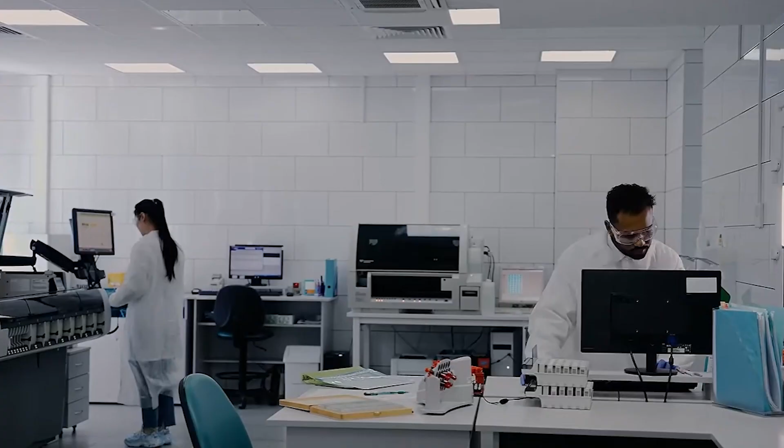A machine in your kitchen right now, humming inside every convenience store and office building across the world, has not fundamentally changed in almost 200 years. An American invented it, but here's what almost nobody knows: Japan is waging its own fierce battle against the exact same machine.

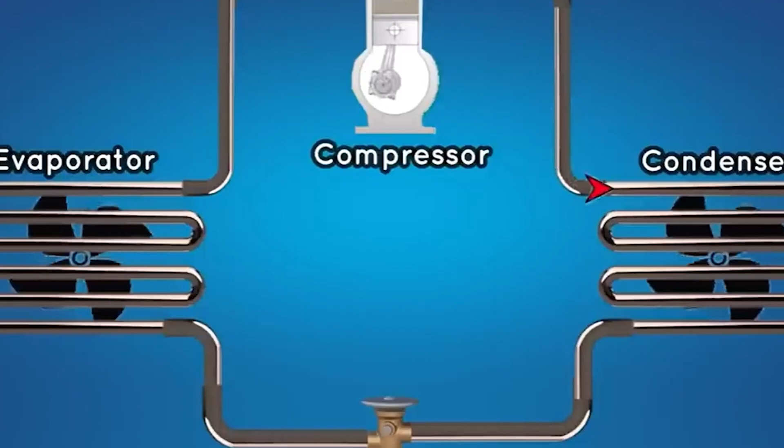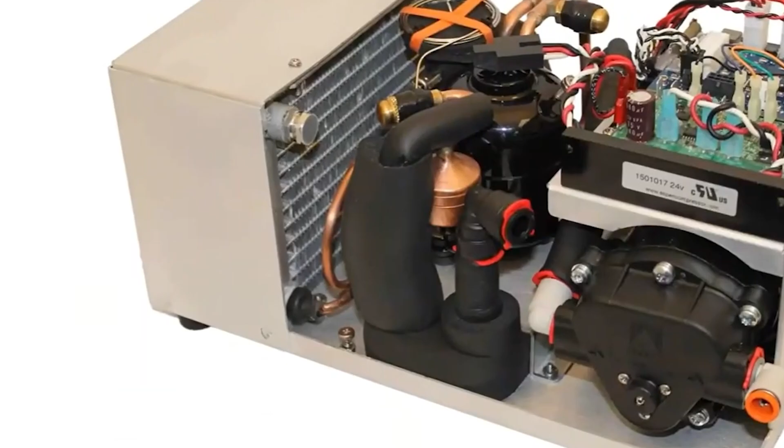Here is what almost nobody thinks about: the refrigerator and the air conditioner were not invented in Japan, nor in Europe, nor in China. The first working vapor compression cooling machine was patented by a man from Newburyport, Massachusetts, named Jacob Perkins, back in 1834. He built a machine that could make ice on demand, and in doing so, he handed the modern world food safety, medicine storage, and livable summers. Nearly two centuries later, the cooling units keeping Tokyo and the world livable still rely entirely on his blueprint.

Now, Japan stands at a critical crossroads, squeezed between brutal summer heat waves, strict environmental laws banning traditional gases, and a strained energy grid. Will the country that mastered the old machine be the one to master its replacement?

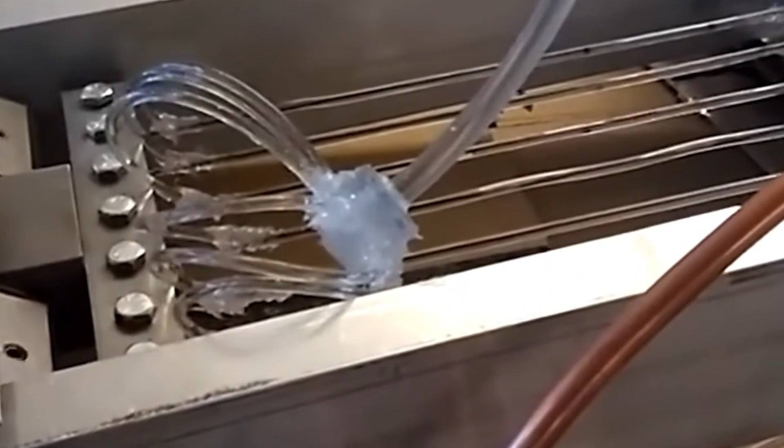While American laboratories in Maryland focus heavily on mechanical hydraulics, rubber-like stretching and squeezing nitinol tubes to escape the 200-year-old vapor compression trap, the intellectual battlegrounds of Japan are approaching the crisis of heat from an entirely different dimension.

In the immaculate, hyper-controlled cleanrooms of the University of Tokyo and the sprawling research complexes of the National Institute of Advanced Industrial Science and Technology, AIST, scientists are looking at the same fundamental problem and arriving at a radically different conclusion. Their answer is not a better machine with fewer moving parts. Their answer is a machine with no moving parts at all.

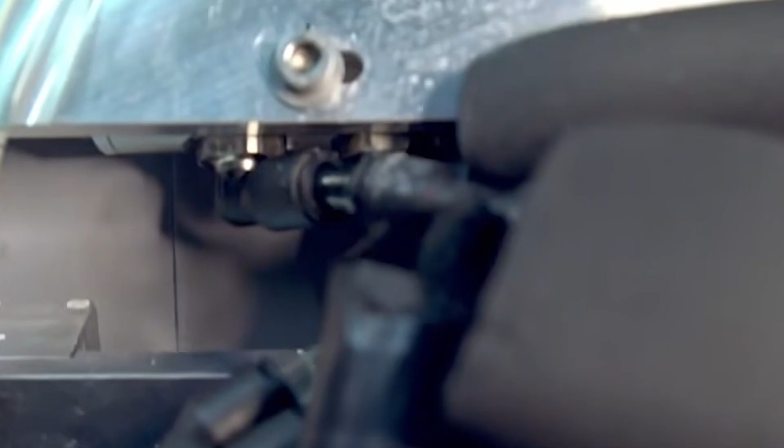This is the frontier of solid-state cooling, and for a nation built on the quiet precision of materials science, it represents a profound national destiny.

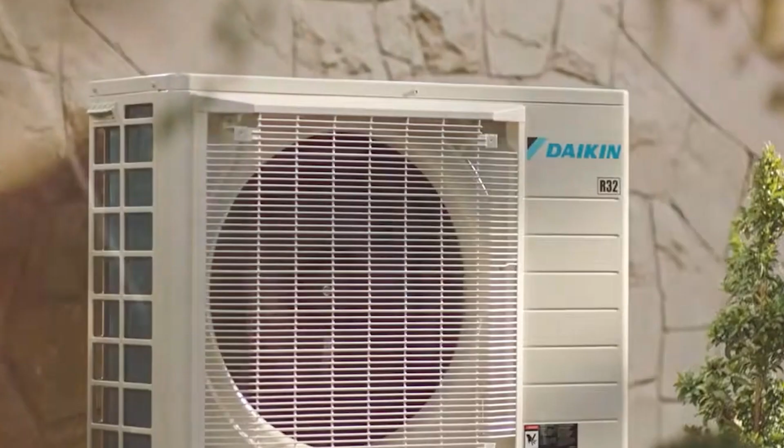To understand why Japanese researchers bypassed the mechanical squeeze, you have to understand the core philosophy of Japanese engineering: efficiency through absolute elegance. A mechanical compressor, no matter how well engineered, relies on friction, pistons, valves, and fluid dynamics. It is a miniature engine living inside your home appliance. But solid-state cooling eliminates the mechanical heartbeat entirely.

Instead of forcing a fluid through pipes or mechanically stressing a metal tube millions of times, solid-state physics manipulates the internal quantum and crystalline structure of matter itself, forcing atoms to release or absorb thermal energy simply by altering their external environment, be it through a magnetic field, an electric charge, or microscopic crystal transformations.

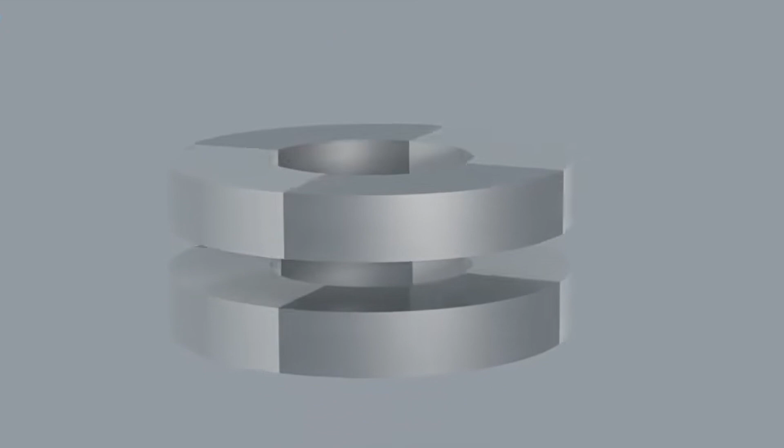At the absolute vanguard of this movement in Japan are two closely related technologies: magnetocaloric and electrocaloric cooling. In a magnetocaloric system, certain specialized rare earth and transition metal alloys possess a fascinating quantum quirk. When you expose them to a magnetic field, their internal magnetic moments abruptly align. This forced orderliness shrinks their magnetic entropy, and as a consequence, the material instantly releases heat. Take the magnetic field away, and the atoms snap back into thermal disorder, greedily drinking in heat from the surrounding air or water.

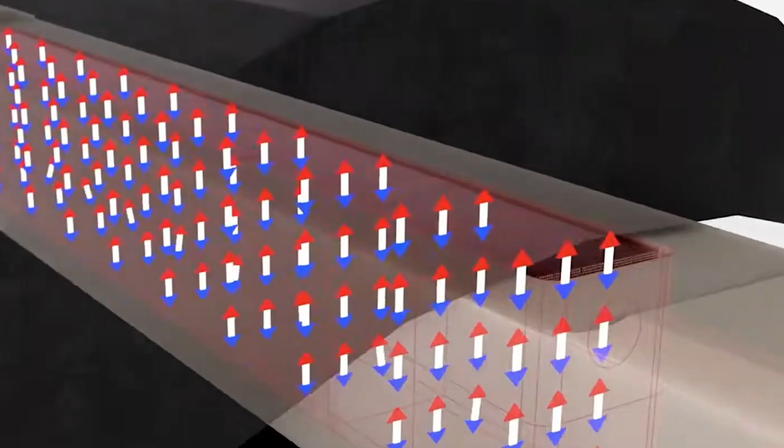There is no gas seeping into the atmosphere. There is no compressor roaring at 2 in the morning. There is only a quiet, oscillating magnetic pulse interacting with a solid metallic matrix.

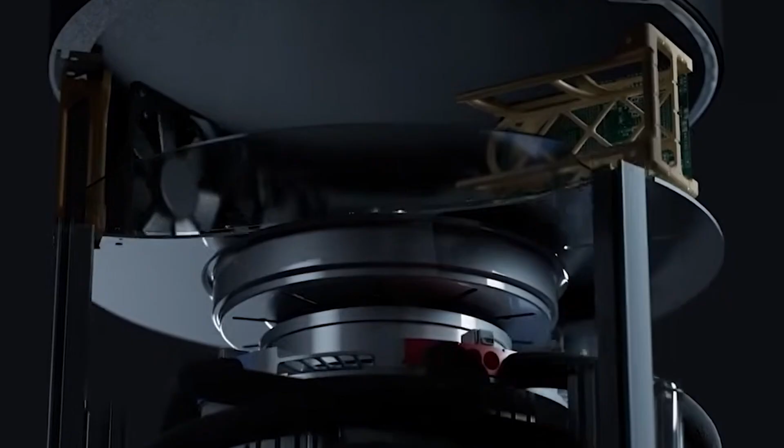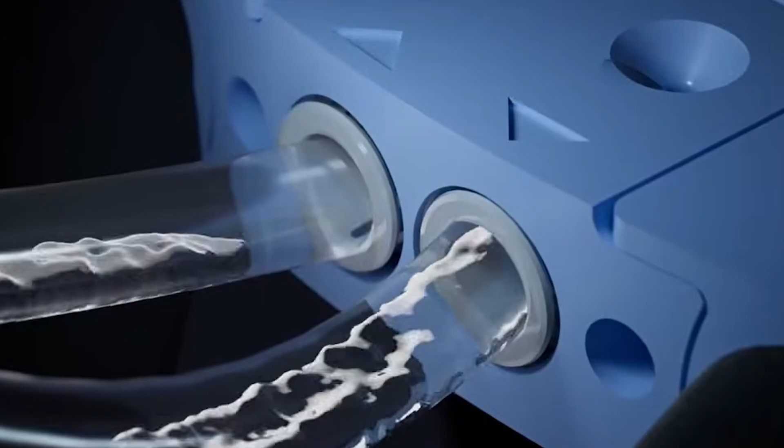Electrocaloric cooling operates on a similar, elegant principle, but uses electricity instead of magnetism. Special ferroelectric ceramics and polymers undergo massive, instantaneous temperature swings when subjected to a fluctuating electrical voltage. Apply a voltage, and the crystal dipoles lock into alignment, dumping heat. Release the voltage, and the structure relaxes into chaotic disorder, plunging in temperature.

For decades, these effects were treated by Western industries as academic curiosities, fascinating physics demonstrations that could chill a microscopic point on a laboratory benchtop by a fraction of a degree, but utterly useless for keeping a Tokyo apartment comfortable during a 40°C August heatwave or chilling bento boxes in a bustling Shibuya convenience store.

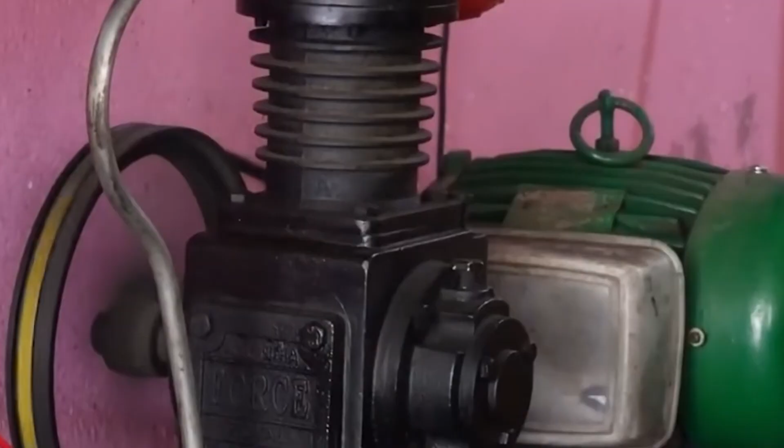The temperature spans were too narrow, the materials too brittle, and the required magnetic or electrical fields too impossibly large for practical engineering. This is where Japan changed the equation, because the country is a global superpower in materials science, honing its expertise through decades of ceramic engineering for bullet trains, advanced semiconductor substrates, and high-frequency electronics. Japanese laboratories began to look at these caloric materials not as fragile lab samples, but as customizable molecular architectures.

Instead of copying foreign designs, research teams across Tsukuba and Kyoto began engineering entirely new chemical compositions.

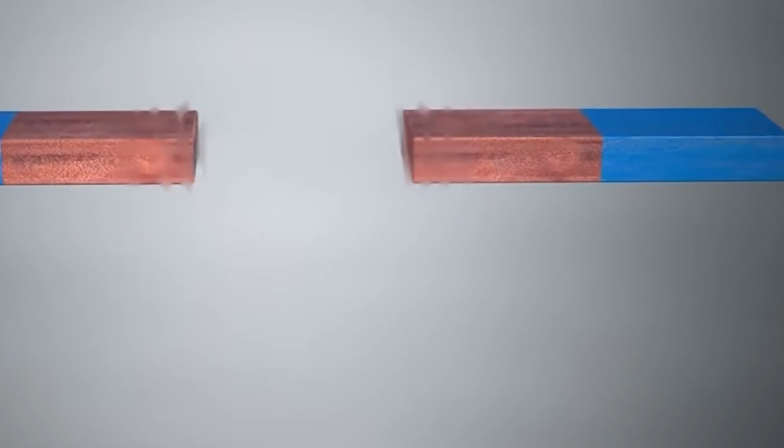They doped lanthanum iron silicon alloys and advanced lead-free ferroelectric ceramics at the atomic level, optimizing crystal grain boundaries to maximize thermal output. They discovered that by tuning the microscopic lattice structures of these materials, they could achieve temperature spikes and drops of tens of degrees, rivaling and eventually surpassing the cooling capacity of traditional chemical refrigerants.

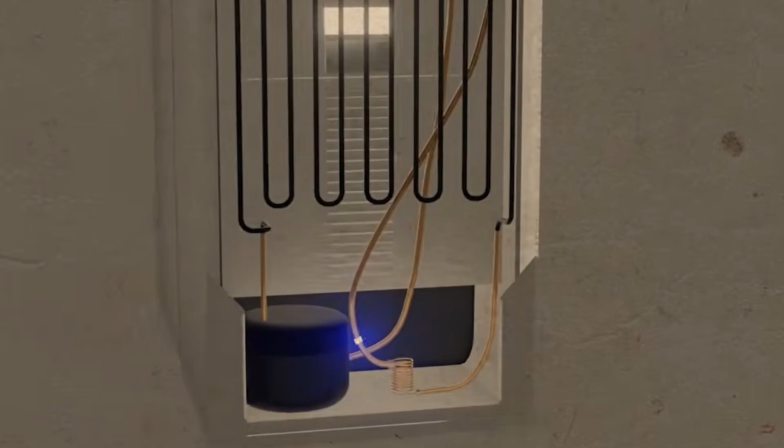Japan's scientific strategy recognized a fundamental truth that the rest of the world was slow to grasp: when you are trying to replace a 200-year-old global technology, you cannot simply build a cleaner version of the old machine. You have to change the medium of reality itself by shifting the entire paradigm from chemistry, trapped gases and synthetic fluids, to physics, solid-state atomic alignment. Japan positioned itself to leapfrog the regulatory traps of global environmental treaties.

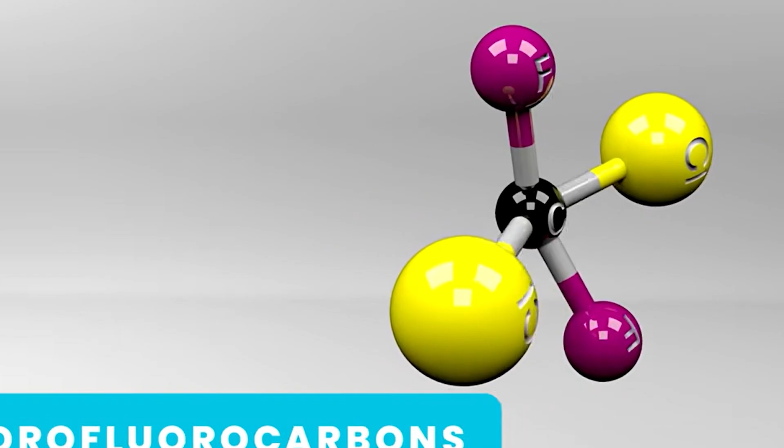Yet translating a brilliant molecular trick from a university spectrometer into a viable commercial product in a resource-constrained island nation is a brutal gauntlet. The moment you take a breakthrough out of the clean room and demand it survive the relentless reality of daily consumer use, you run straight into a microscopic wall of physics that has humbled generations of engineers. Moving a revolutionary cooling technology from a university spectrometer to a commercial appliance factory is a brutal engineering gauntlet - it is the graveyard of thousands of brilliant physics concepts.

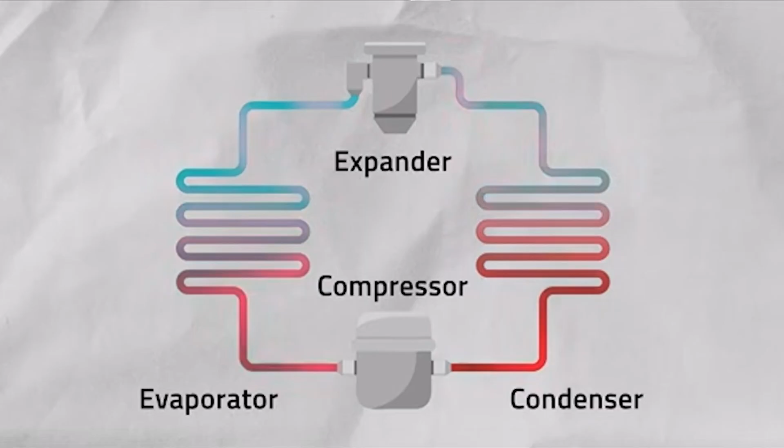For decades, researchers across the globe discovered fascinating caloric materials that could spike or drop in temperature under magnetic fields, electric voltages, or mechanical stress. Yet nearly every single early prototype shared a fatal flaw: it possessed a heartbreakingly short lifespan.

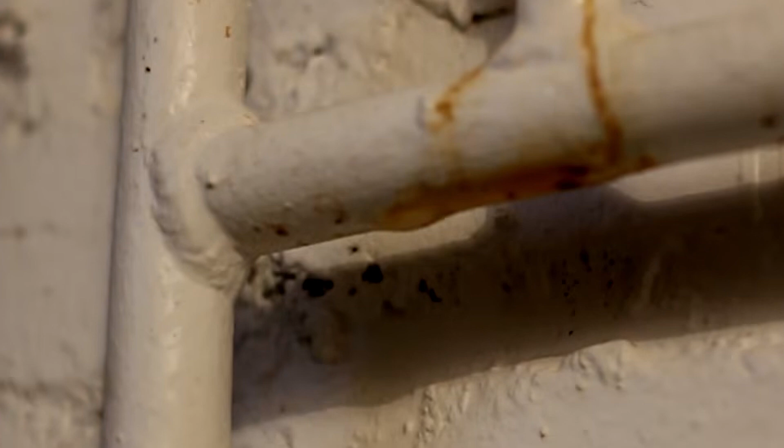To understand why building a solid-state cooling device is an exercise in extreme frustration, you have to look at what an appliance demands of its core mechanism. A household refrigerator or a commercial air conditioning unit in a Tokyo office building does not cycle a few hundred times. It operates continuously, switching on and off thousands of times a year, enduring tens of millions of distinct thermodynamic cycles over a decade or more of service.

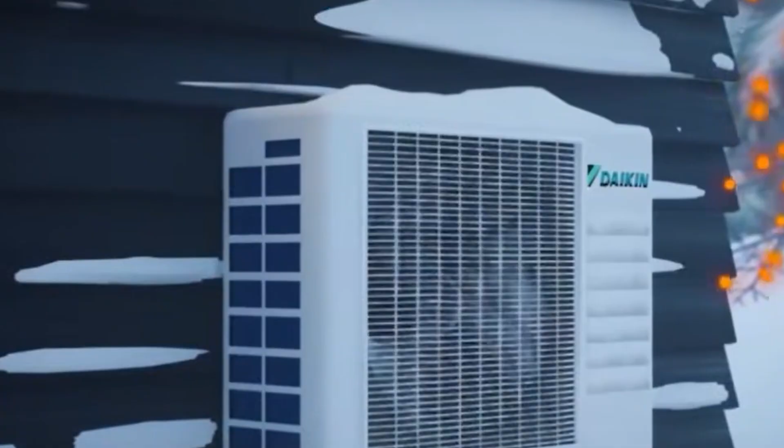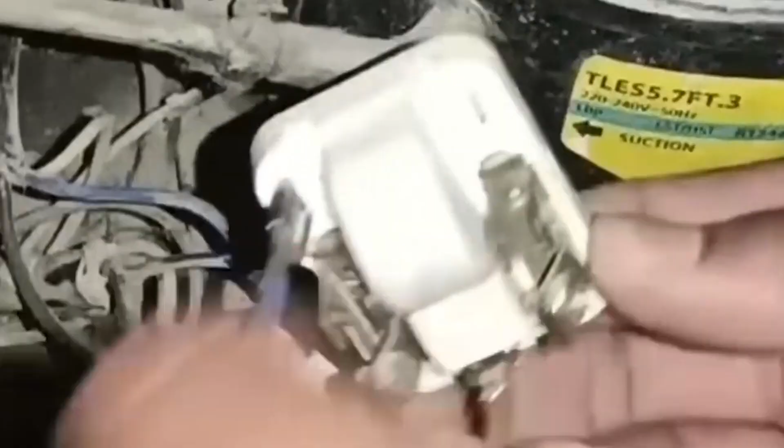Traditional vapor compression systems handle this through brute force. A mechanical compressor is built from heavy steel pistons, thick bearings, and durable motor windings designed to withstand continuous vibration. When a compressor finally dies after 15 years, it usually fails because a seal degraded or a bearing wore down from sheer friction. Solid-state cooling systems do not have friction in the traditional sense, but they face an even more insidious enemy: microscopic fatigue.

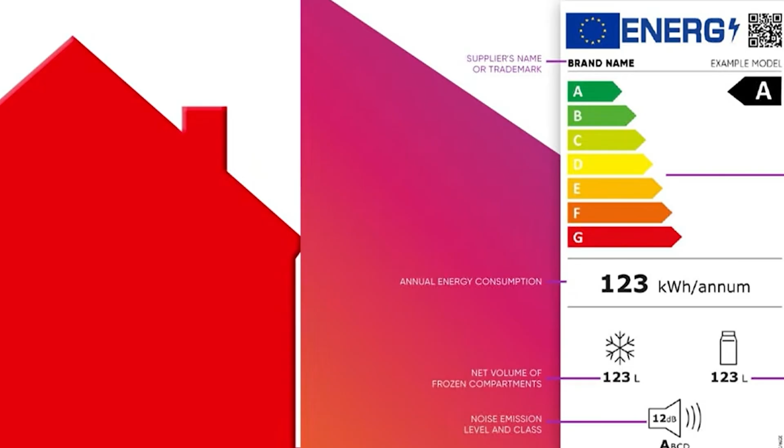When advanced alloys, shape memory metals, or ferroelectric ceramics undergo continuous phase transitions, rapidly snapping their internal crystal structures between ordered and disordered states millions of times, the material itself experiences internal trauma. At the atomic scale, no metal or ceramic is entirely uniform. Every sample contains microscopic voids, tiny boundary shifts, or slight imperfections born during the manufacturing process. Every single time the material triggers its cooling or heating cycle, those microscopic flaws experience localized stress.

In early solid-state prototypes, researchers watched in dismay as beautiful, high-performing cooling cores developed microscopic hairline fractures after just a few thousand cycles. Within weeks of continuous operation, the stress concentration widened those cracks, and the expensive alloy or ceramic sheared entirely in half, rendering the machine useless. The physics worked brilliantly, but the materials literally tore themselves apart from repetition.

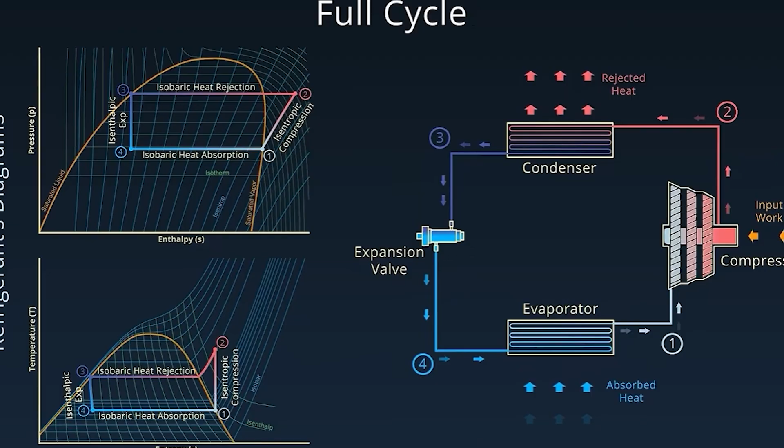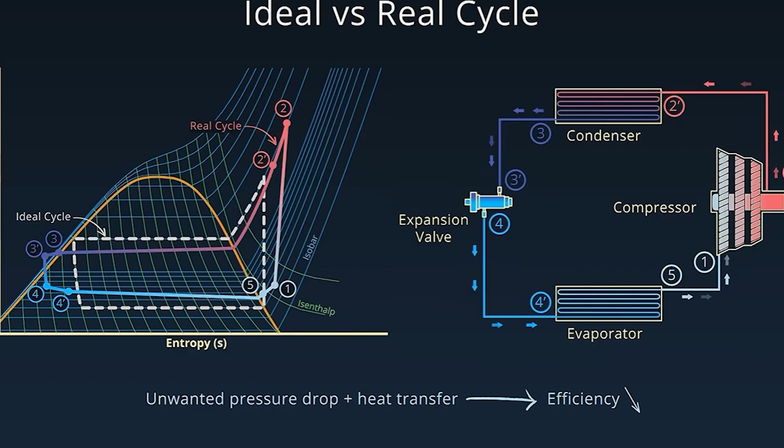For Japanese research institutions and advanced materials labs, solving this fatigue wall became the ultimate obsession. Japanese engineering thrives on longevity - the culture that created machinery designed to run seamlessly for decades without maintenance could not accept a cooling core that self-destructed in a month.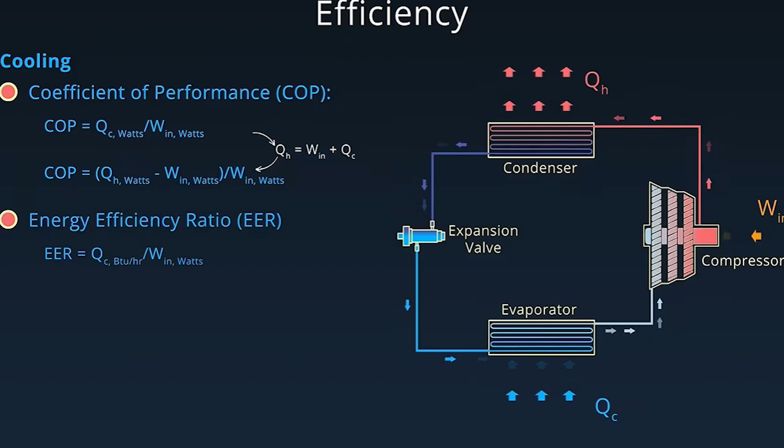To conquer this wall, material scientists began manipulating the microstructure of the cooling elements at a quantum level. Instead of relying on bulk metals that cracked under uniform stress, teams at industrial R&D hubs began developing composite matrices. They embedded active caloric particles inside flexible, high-durability polymer binders, or engineered advanced single-crystal structures where the atomic lattice could shift gracefully without creating stress focal points. By controlling grain growth with extreme precision during the casting and sintering processes, they forced the materials to absorb millions of structural transitions without propagating cracks.

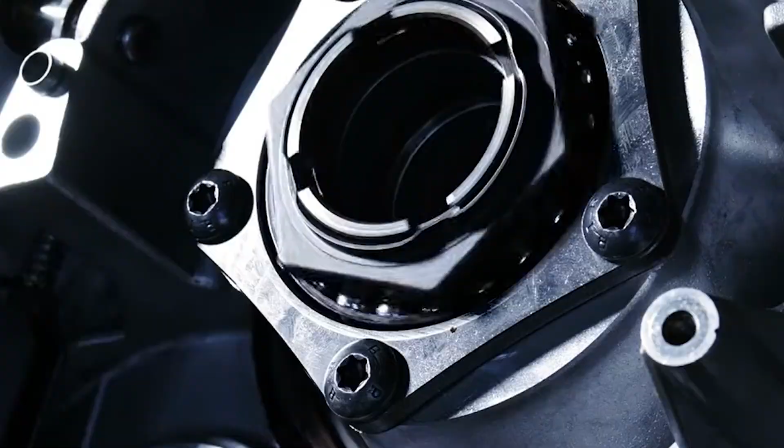Furthermore, engineers had to rethink how thermal energy was transferred away from these solid cores. Because there is no rushing river of chemical gas to carry heat to the back coils, solid-state systems rely on secondary heat transfer loops, often using plain, safe water or specialized microchannels that snake directly through the solid matrix. Designing these fluid pathways to handle millions of rapid thermal expansion and contraction cycles without leaking added an entirely separate layer of mechanical complexity.

The challenge of durability proved that inventing a revolutionary cooling effect is only the first step.

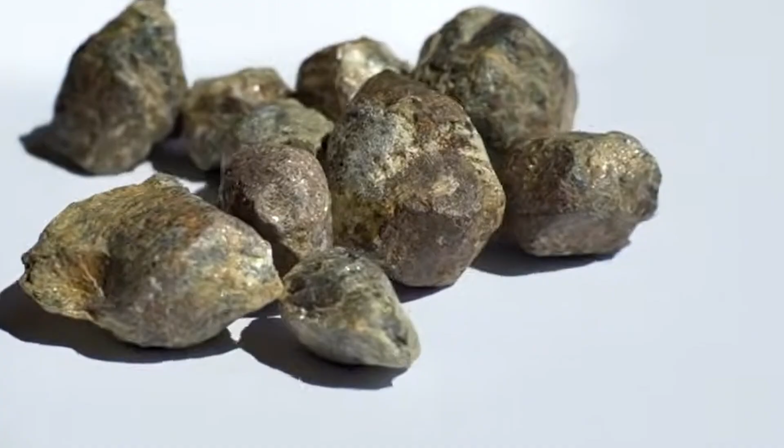The true test of an industrial civilization is whether it can force exotic physics to behave with the mundane, unbreakable reliability of a kitchen appliance. As Japanese labs in Tsukuba and Kyoto began pushing past the fatigue wall, they realized that solving the material's lifespan was only opening the door to an even greater national imperative: making the technology small enough, quiet enough, and precise enough to fit into a changing society.

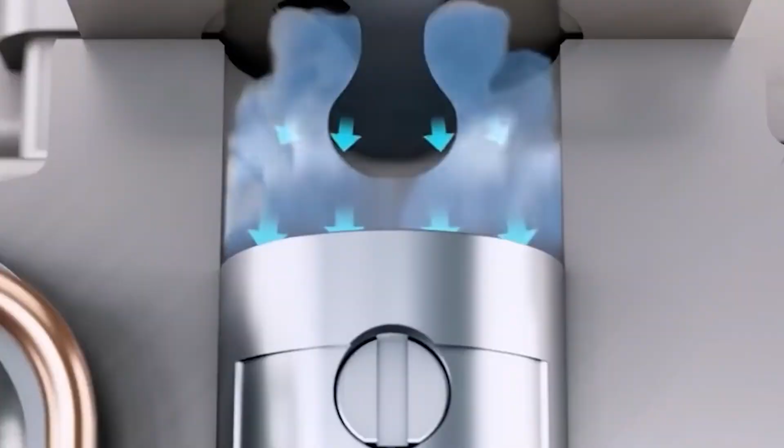When you strip away the heavy compressors, the roaring fans, and the miles of copper tubing filled with pressurized chemical gas, you are left with something radical: a cooling system that takes up almost no space and makes virtually no sound. For a nation like Japan, where space is intensely curated and the cultural appreciation for tranquility is deeply rooted, this is not merely an engineering upgrade. It is an invitation to rethink how machinery coexists with human life.

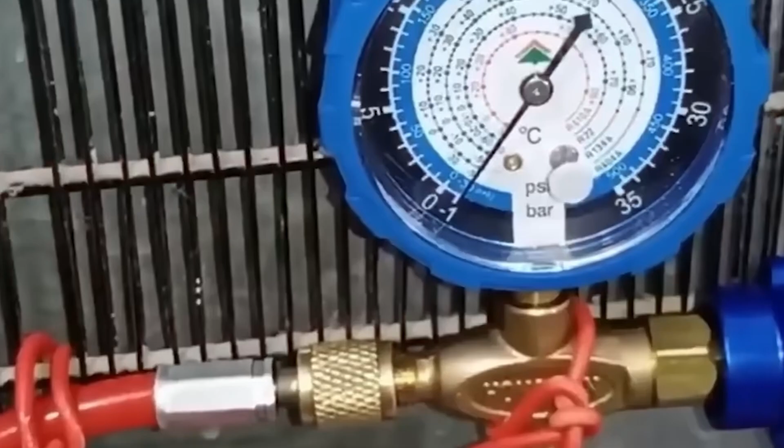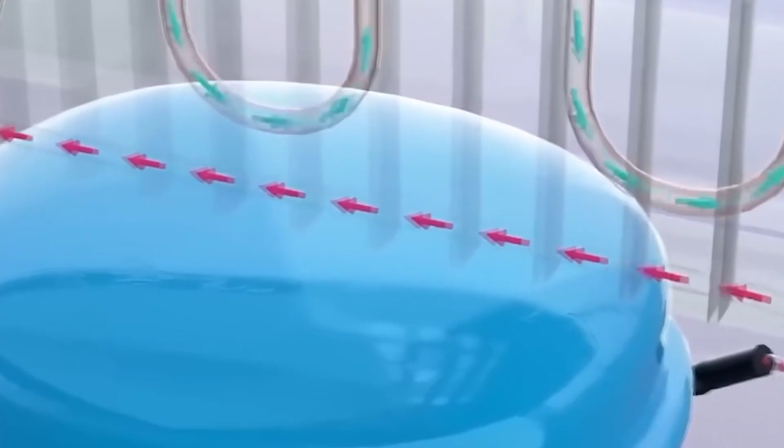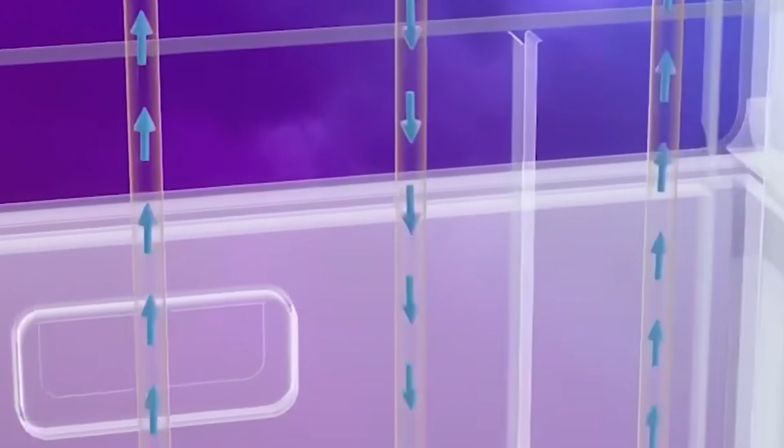In Japanese manufacturing, there is a guiding philosophy known as Monozukuri, the art, science, and spirit of making things. It emphasizes craftsmanship, continuous improvement, and an obsessive pursuit of perfection, particularly when it comes to shrinking technology without sacrificing power. For decades, Japanese consumer electronics companies mastered the art of miniaturization, packing unimaginable computing power into slim smartphones, whisper-quiet laptops, and pocket-sized devices. Yet, while electronics grew smaller and quieter, the thermal management systems required to keep them from melting remained trapped in the 19th century.

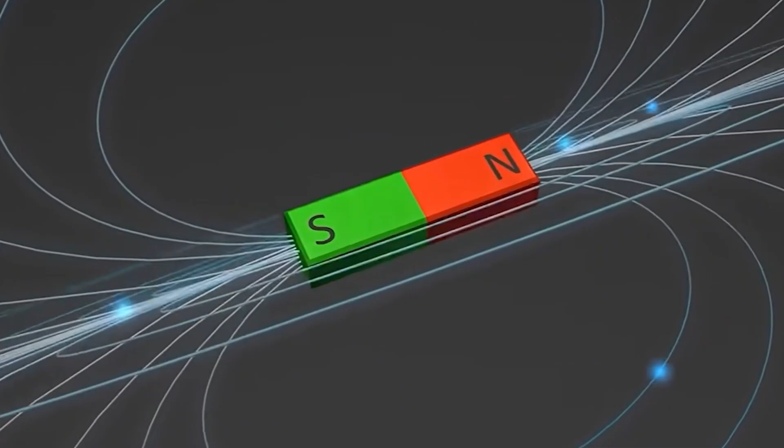A traditional vapor compression refrigerator or air conditioner cannot be shrunk beyond a certain physical limit. You need a motor, a compressor pump, expansion valves, and a specific volume of gas to manage thermodynamic cycles effectively. This physical constraint has long dictated the architecture of our homes, vehicles, and appliances. Fridges must be bulky metal boxes. Air conditioners require massive outdoor condenser units bolted to building exteriors.

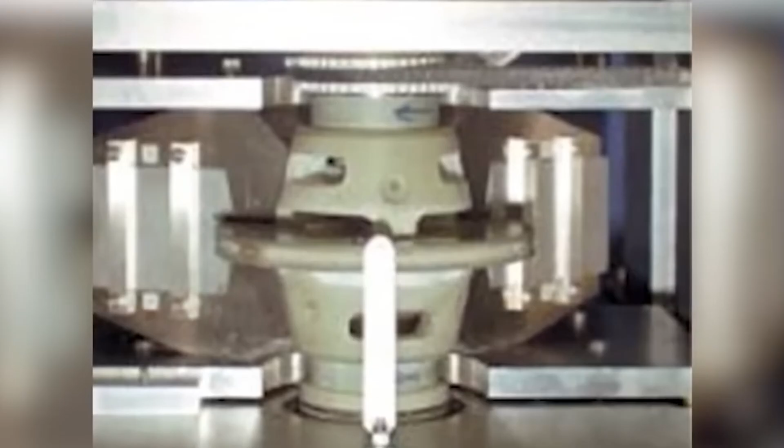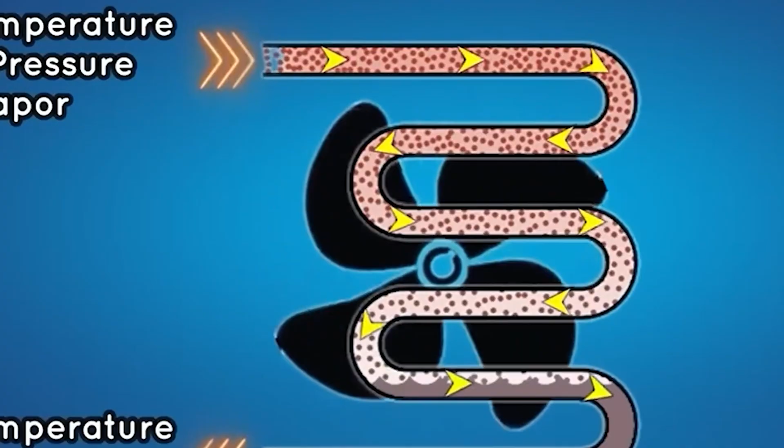Solid-state caloric cooling shatters these architectural boundaries entirely, because the cooling effect is generated directly within the atomic matrix of a solid material. Whether through magnetocaloric, electrocaloric, or elastocaloric phase changes, the cooling engine no longer needs to look like an engine. It can take any shape. It can be formed into a flat sheet, sculpted into a honeycomb cylinder, or miniaturized into a tiny module no larger than a deck of cards or a postage stamp.

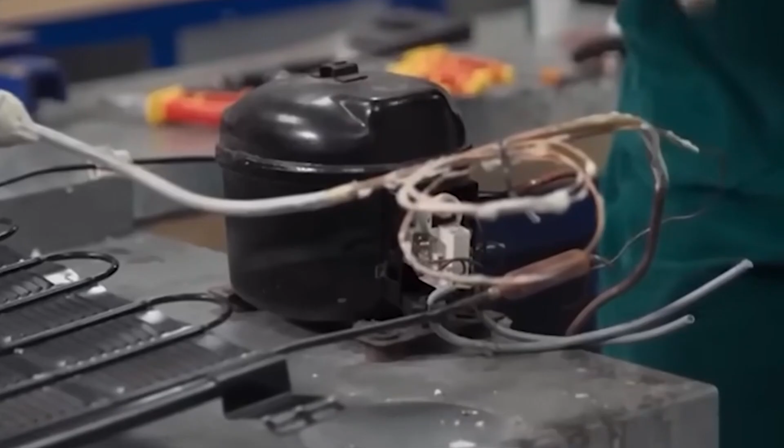This scalability unlocks entirely new frontiers where traditional vapor compression is utterly useless. Take, for instance, the modern data center. As advanced artificial intelligence clusters and massive server farms process billions of parameters daily in cities across the globe, they generate concentrated, ferocious heat in hyperdense spaces. Traditional liquid chilling loops and massive rooftop air handlers consume staggering amounts of electricity, sometimes requiring millions of gallons of water just to keep server racks from overheating.

A solid-state cooling core changes the geometry of thermal management. Instead of pumping chilled air across an entire room or forcing liquid through complex external plumbing, a flat, solid-state caloric module can be embedded directly against the microprocessors themselves. It can pump heat away at the exact point of generation, with zero noise, zero vibration, and a fraction of the energy footprint. Consider the electric vehicle.

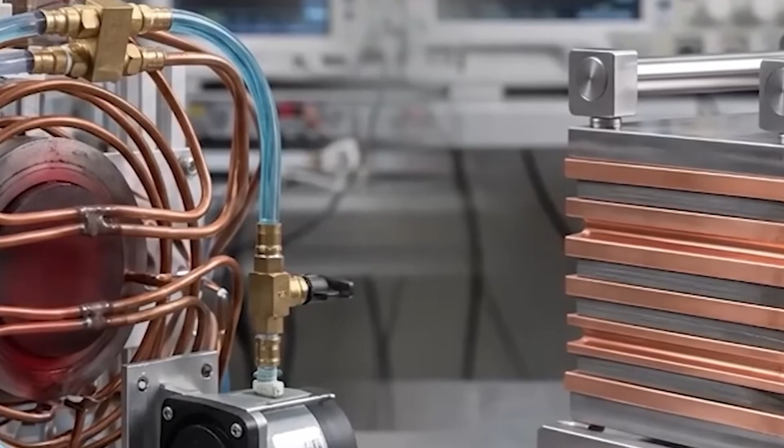In modern EVs, fast charging sessions generate intense thermal stress inside the battery pack. Managing that heat effectively dictates how long the battery survives and whether it operates safely. Current thermal management systems add significant weight, complex plumbing, and numerous potential failure points to the vehicle. A compact, solid-state cooling element can be integrated seamlessly into the battery modules, conforming to the contours of the pack itself, providing targeted, instant temperature control without heavy compressors or vulnerable refrigerant lines.

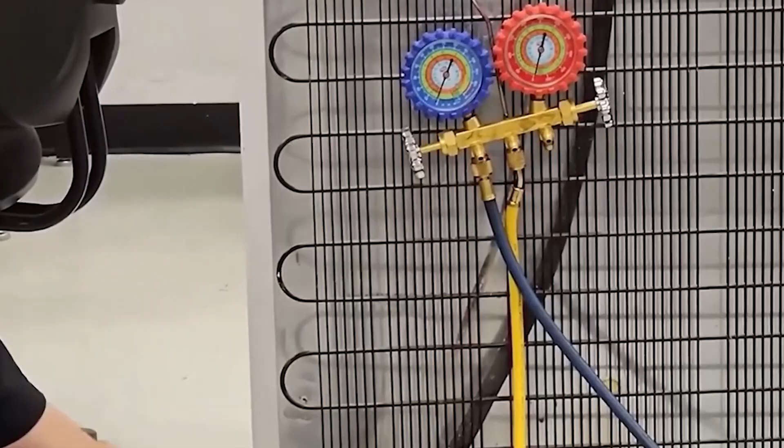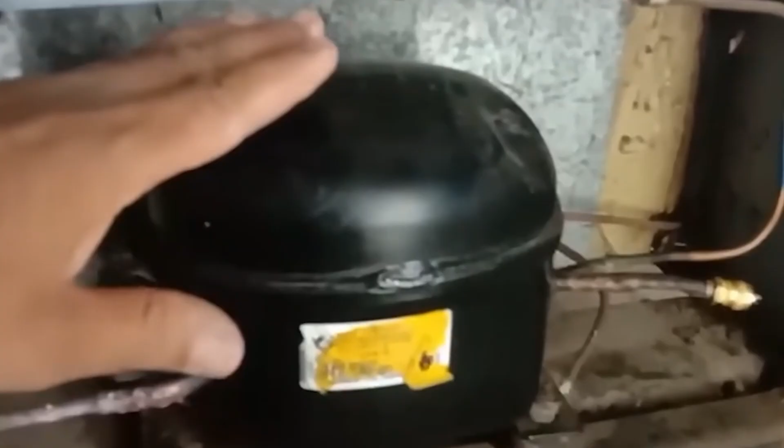Even in high-precision robotics, a sector where Japan is a global pioneer, the implications are profound. Humanoid robots and advanced automation systems require tight thermal control for their internal actuators and computing units. Traditional cooling systems are heavy, awkward, and introduce mechanical vibrations that interfere with delicate sensors. Solid-state modules offer silent, vibration-free temperature regulation that can fit into the tightest limbs and joints of a robot without adding dead weight.

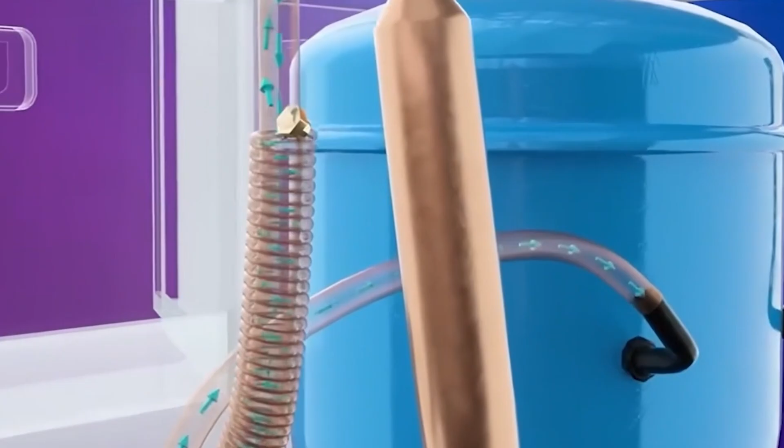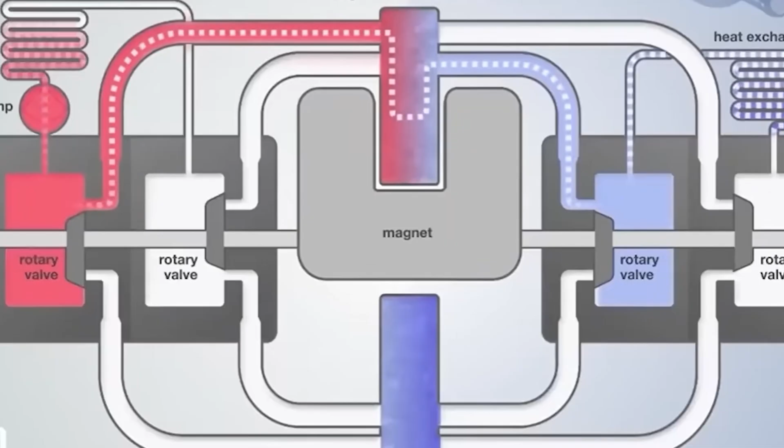Furthermore, this extreme miniaturization aligns perfectly with Japan's broader ecological goals. In a society facing a shrinking workforce and a critical need to optimize energy consumption across every sector, appliances that use less power, occupy minimal space, and operate in total silence represent the ultimate evolution of design. Yet, as laboratories in Tokyo and Kyoto successfully demonstrate these postage stamp-sized cooling cores, working with astonishing efficiency on test benches, they face a daunting final hurdle. Moving from a brilliant conceptual breakthrough that fits in the palm of a hand to a mass-produced commercial reality means confronting the giants of global manufacturing and the entrenched supremacy of the 150-year-old compressor.

The distance between a triumphant laboratory demonstration and a product sitting on a warehouse shelf is measured in billions of dollars, decades of industrial muscle, and the fierce resistance of entrenched incumbents. For all the elegant physics of solid-state cooling, its material science breakthroughs, and its silent, miniaturized potential, it faces a monumental adversary: the modern vapor compression machine, optimized by global industry for a century and a half.

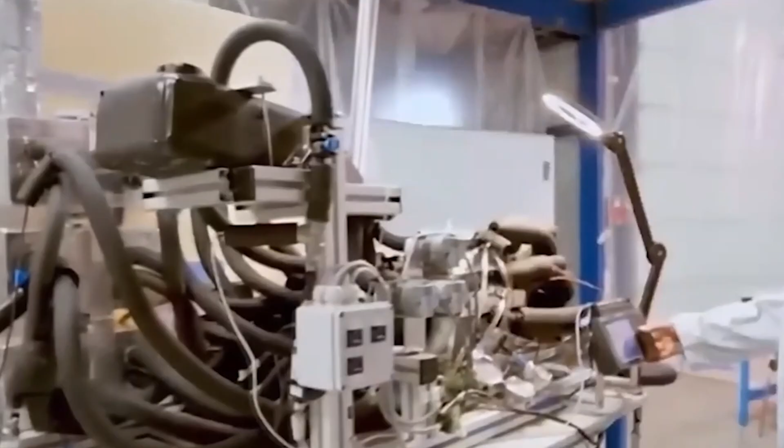In boardrooms across Tokyo, Osaka, and Nagoya, legacy manufacturing giants, household names like Daikin, Panasonic, Mitsubishi Electric, and Toshiba find themselves standing at a historic crossroads. These companies built their global empires on the back of traditional cooling. They operate massive factories, stamping out millions of highly efficient, reliable, and dirt-cheap compressors every single year. Their supply chains are deeply entrenched, their manufacturing tolerances are calibrated to micrometer precision for copper and steel.

Their engineering teams have wrung every possible fraction of efficiency out of the vapor compression cycle. To a traditional corporate strategist, pivoting away from this proven architecture looks like an economic gamble of terrifying proportions. Why abandon a multi-billion-dollar cash cow that runs like clockwork?

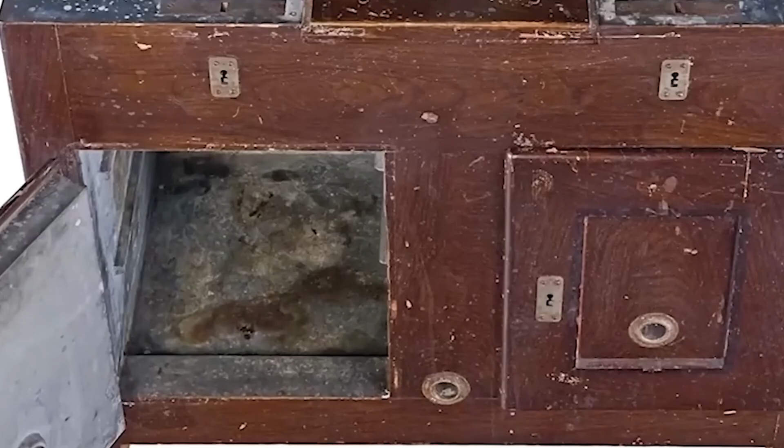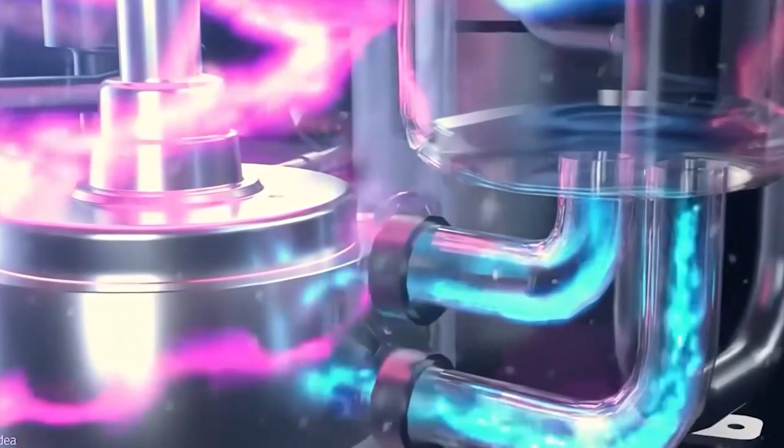The answer is that the ground beneath their feet is shifting irrevocably. Regulatory pressure has turned the traditional chemical refrigerant market into a ticking clock. Under international environmental agreements and strict domestic legislation mirroring global phase-downs of high GWP gases, traditional chemical refrigerants are being systematically outlawed. Japan's industrial sector has already invested heavily in transitional chemical alternatives, such as the R32 refrigerant, pioneered widely by Daikin. R32 lowered the environmental impact compared to older legacy gases, but it is still a chemical fluid under pressure, carrying long-term regulatory vulnerability and safety considerations like mild flammability.

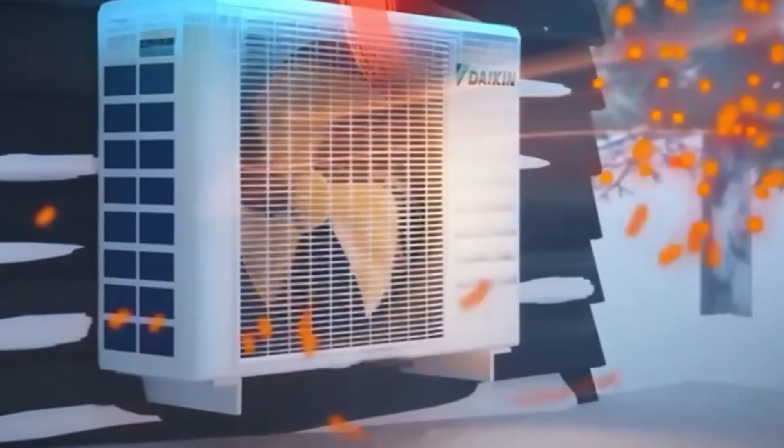The writing on the wall is clear to forward-thinking executives. Transitional gases are merely a temporary stay of execution. Eventually, environmental regulations will tighten further, or the economic cost of managing synthetic fluids will outweigh the benefits. When that day arrives, companies that rely entirely on vapor compression will face a sudden, catastrophic obsolescence.

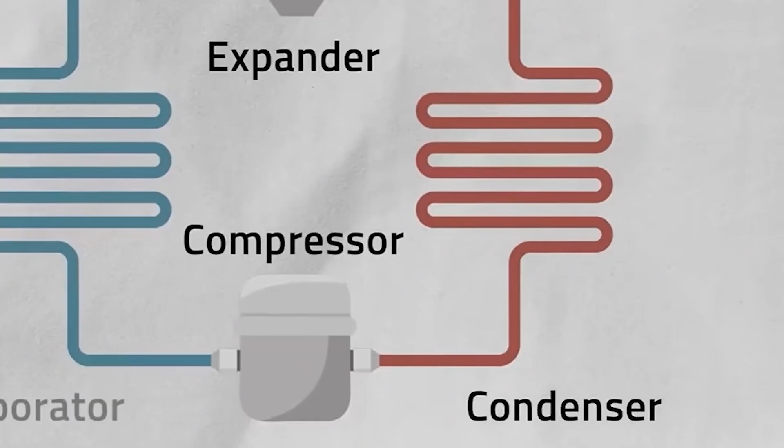This reality has forced a dual strategy inside Japan's industrial research complexes. On one hand, legacy giants continue to refine traditional systems, driving inverter efficiency to astonishing heights and building smart, AI-optimized climate controls for modern homes. On the other hand, they are quietly, intensely funding and co-developing next-generation solid-state and caloric cooling research alongside national institutes like AIST. However, transitioning from research to mass production exposes brutal economic realities.

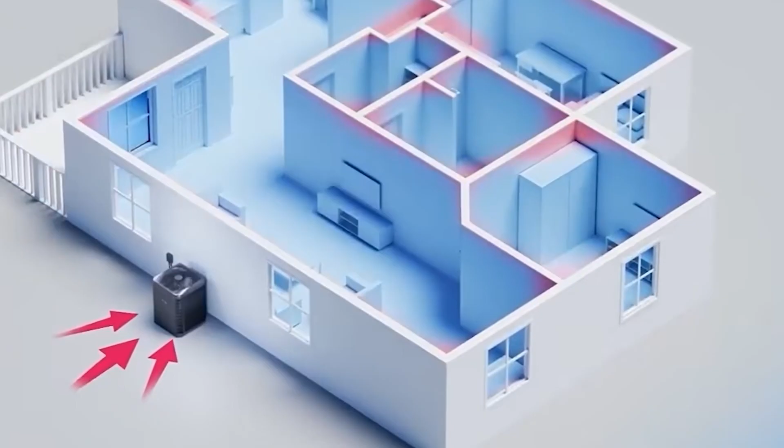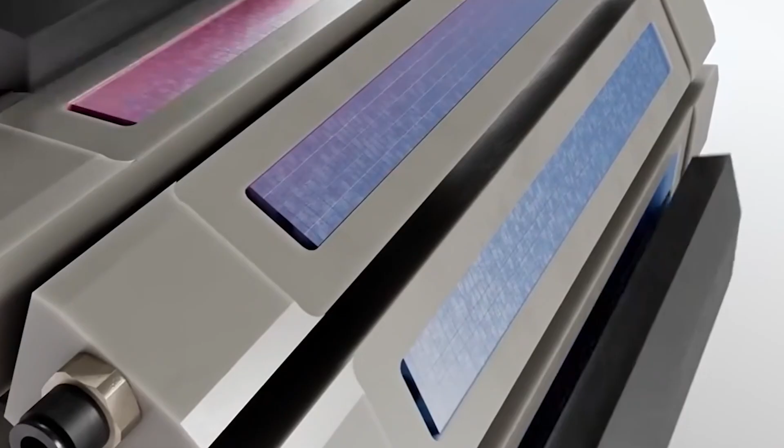Solid-state cooling relies on exotic materials, specialized rare earth alloys, complex ferroelectric ceramics, or precise shape memory lattices that require hyper-controlled manufacturing environments. Melting and sintering these materials without introducing microscopic structural defects demands specialty furnaces, extreme vacuum conditions, and raw material purity that borders on the absurd.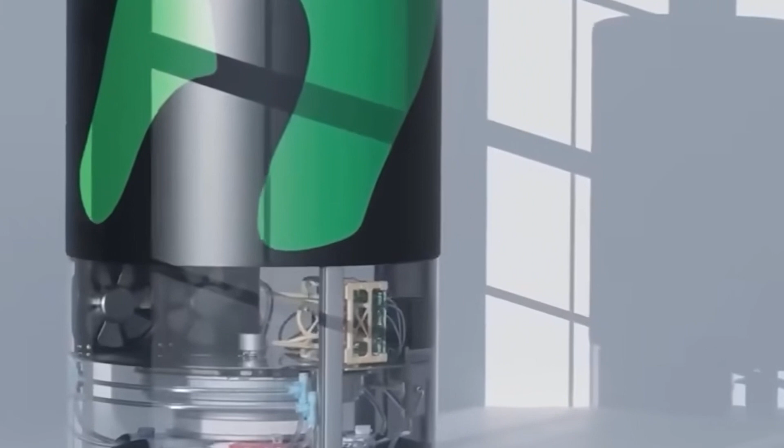While a traditional compressor is stamped out of cheap, abundant steel by automated assembly lines in a matter of minutes, a high-performance solid-state cooling core is currently closer in complexity to a high-end semiconductor chip. The upfront capital cost of retooling a factory floor to produce solid-state cores at scale is staggering.

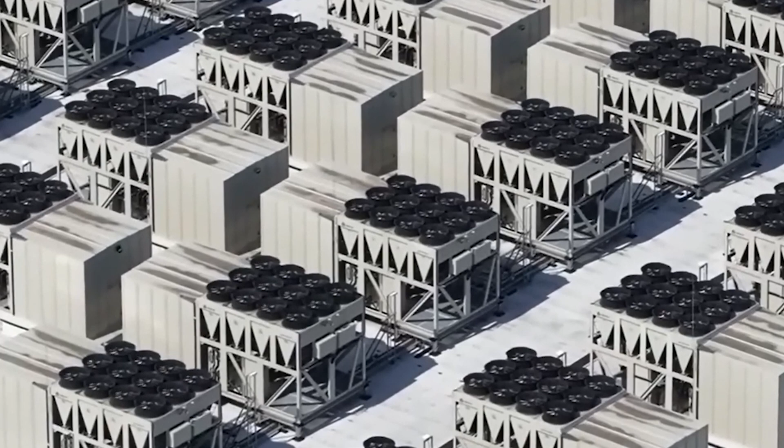Furthermore, the incumbent machine is not sitting still. A vapor compression system is cheap, incredibly powerful per unit of volume, and backed by a global network of repair technicians who know how to fix a leaking pipe or replace a worn-out fan motor. A solid-state cooling device must not only match that cooling output, it must do so at a price point that makes economic sense for a consumer buying a household refrigerator or a small office air conditioner.

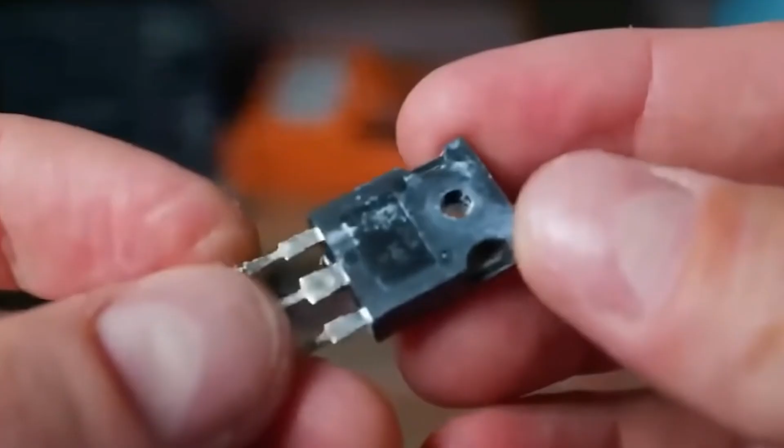Yet, history shows that this is precisely the friction point where paradigm shifts occur. Every transformative technology, from the early mainframe computers that filled entire rooms to the initial solar cells that were once priced exclusively for satellite programs, began as an impossibly expensive laboratory novelty. They crossed the chasm, not because they were marginally better at the old game, but because they changed the rules of the game entirely.

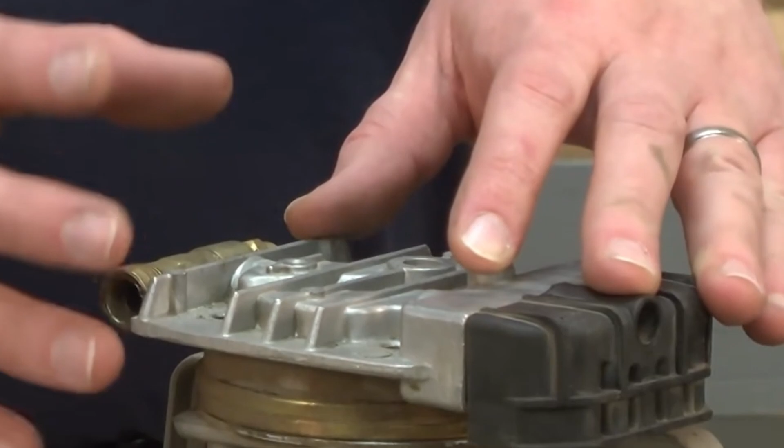As Japanese industrial leaders weigh the immense costs of retooling against the inevitable arrival of a gas-free future, a quiet realization is taking hold. The race to commercialize solid-state cooling is no longer just a technical exercise, it is a race for industrial sovereignty. The company and the country that successfully scales the solid-state core from a fragile lab bench into an unshakable, mass-produced commercial reality will dictate the thermal architecture of the 21st century.

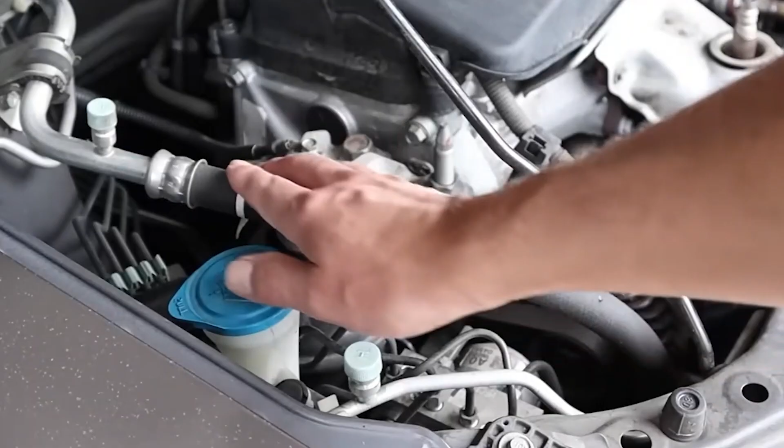And that race is about to step out of the clean room and into the most ubiquitous retail space in modern Japanese society.

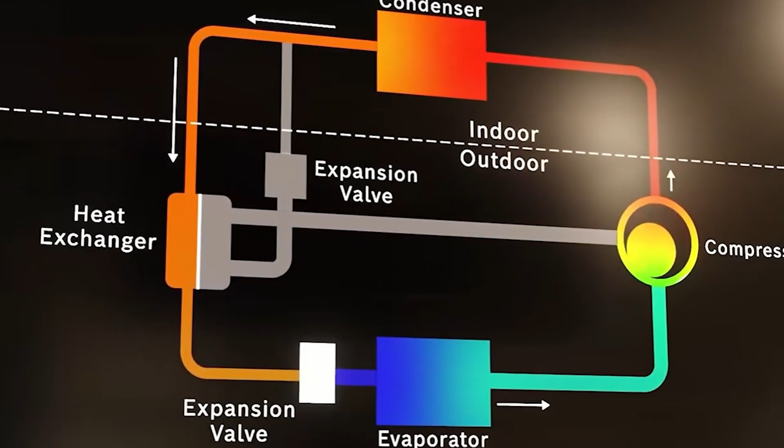Step outside onto a neon-lit Tokyo street on a stifling July evening, and you will encounter the heartbeat of modern Japanese urban life, the konbini, or convenience store. They sit on nearly every corner, glowing brightly through the humid night, offering sanctuary with a blast of chilled air the moment you slide open the automatic glass doors. Rows of refrigerated display cases showcase bento boxes, iced coffees, and dairy products, while overhead, commercial air conditioning units wage a relentless war against the concrete heat island of the metropolis.

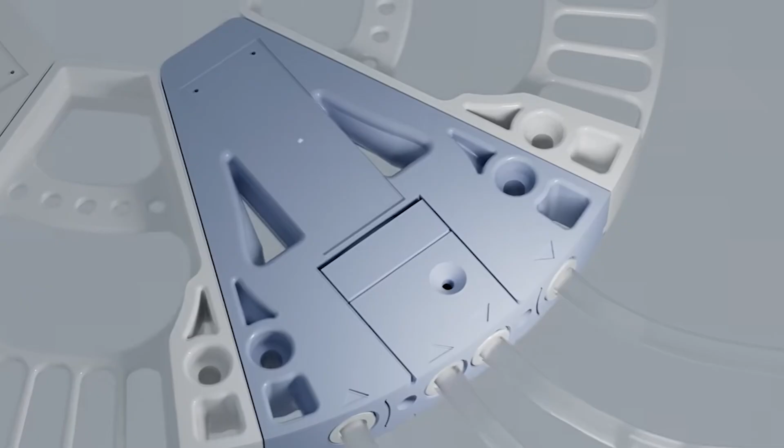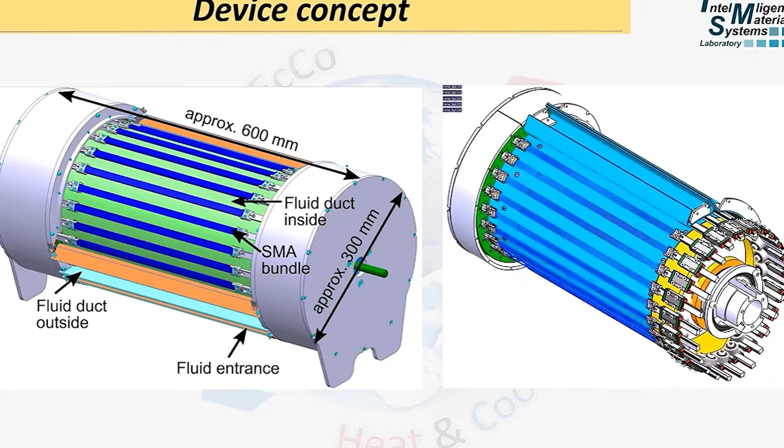Right now, that entire sensory experience, the rushing blast of chilled air, the fluorescent hum, the hidden vibration of industrial compressors throbbing behind the back walls, is running on borrowed time. When you trace the arc of this technological revolution, from the foundational 1834 invention of vapor compression by an American tinkerer to the hyper-controlled material science clean rooms of Tokyo and Tsukuba, the ultimate destination becomes strikingly clear. The transition away from the 200-year-old machine is no longer a wild science fiction fantasy. It is an engineering inevitability forced by the unforgiving convergence of climate physics, strict international environmental law, and the sheer thermal demands of an increasingly overheated planet.

Imagine walking into that same neighborhood konbini a decade from now. The sliding doors open, and the air inside is perfectly, refreshingly cool. But something is profoundly, wonderfully different. The heavy, rhythmic pulsing of the mechanical compressors is entirely gone. There is no low-frequency vibration rattling through floorboards, no frantic clicking of electrical relays turning heavy motors on and off in the middle of the night, and no background roar of industrial fans struggling against trapped heat.

The glass display cases holding your cold drinks maintain their precise, life-preserving temperatures through a network of silent, solid-state caloric modules. Instead of pistons and pressurized pipes, these systems rely on advanced magnetocaloric or electrocaloric arrays, specialized alloys and ferroelectric ceramics quietly shifting their internal atomic structures, absorbing and releasing heat with the serene, frictionless efficiency of physics itself.

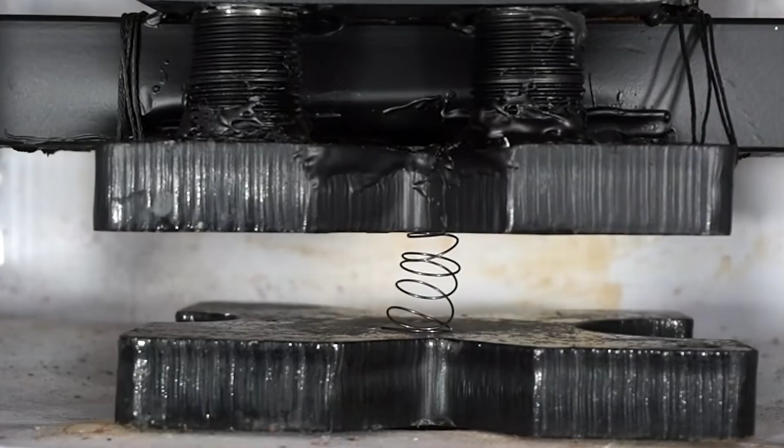If a thermal management line were somehow damaged, there is no toxic, high GWP synthetic chemical gas escaping into the atmosphere to trigger regulatory alarms or contribute to global warming. There is no volatile refrigerant hissing into the aisles. There is only a secure, inert solid-state core or a simple, safe secondary loop of plain water.

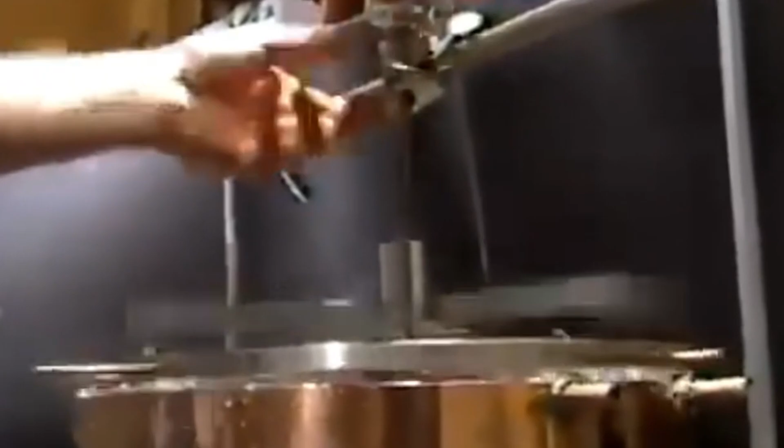And when the unit finally reaches the end of its exceptionally long service life decades down the line, a technician does not need to extract regulated chemical fluids with specialized recovery cylinders. The advanced metals and ceramics can be safely recycled back into the industrial supply chain, returning cleanly to the materials economy. This is the ultimate promise of the gas-free revolution. It replaces a chaotic system of fluid dynamics, dangerous pressures, and mechanical wear with the quiet, elegant predictability of solid-state engineering. Yet, as we stand on the precipice of this shift, a lingering question remains.

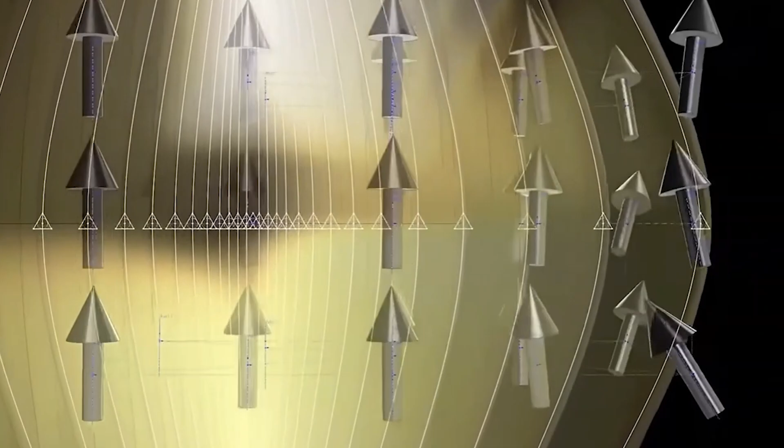The compressor is not merely an appliance part tucked away quietly in a kitchen corner or a convenience store backroom. It is embedded everywhere in modern industrial civilization, humming in the dropped ceiling of your office building, riding beneath the floorboards of your Shinkansen bullet train, regulating the massive battery packs of your electric vehicle, and keeping the artificial intelligence data centers of the future from melting down under astronomical computational loads. The modern world was quite literally built on the back of artificial cooling. Without it, medicine spoils, food chains collapse, and vast portions of the global map become unlivable during the peak of summer.

But the machine that gave us this modern life is fundamentally reaching the end of its evolutionary road. You can only polish a 19th century piston and a pressurized chemical loop for so long before the physics of the universe pushes back. If solid-state and caloric cooling scale the way their pioneers envision, these massive, roaring machines will eventually fall completely silent. The ubiquitous hum of the compressor will fade into history, replaced by the ghost of a sound we grew up with without ever truly noticing it was there.

The country that masters this silent transition will not merely build a better household refrigerator or a more efficient office air conditioner. It will completely redefine how humanity handles the heat of the future, transforming the most stubborn thermal burden of the industrial age into a quiet, seamless whisper. And that leaves a fascinating question for the years ahead. When the very last compressor finally shuts off, which machine in your life will you miss the sound of the most, and which one will you be happiest to see go silent forever?